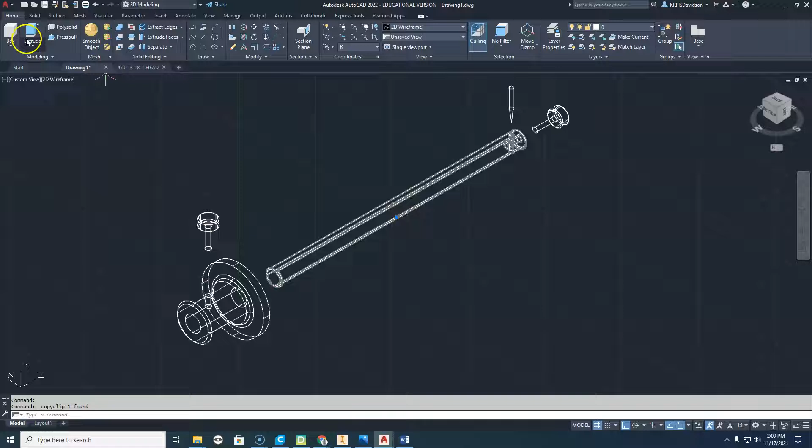Alright, so we're going to make the beam here, just a drawing for the beam in this video, and then we'll move on. So I'm going to go over here and go into this right here, Control C, go to New, and then Control V. I'm going to place that in there somewhere right about here.

Obviously now I look at that and I know right away that if this is my front view, that is not what I want my front view to be. So I'm going to click on that, 3D rotate, and rotate this down. Hit F8 so I get that on there. So I'm going to rotate that down this way. I want to make sure that the flat, which is laying on the back there, is straight up and down.

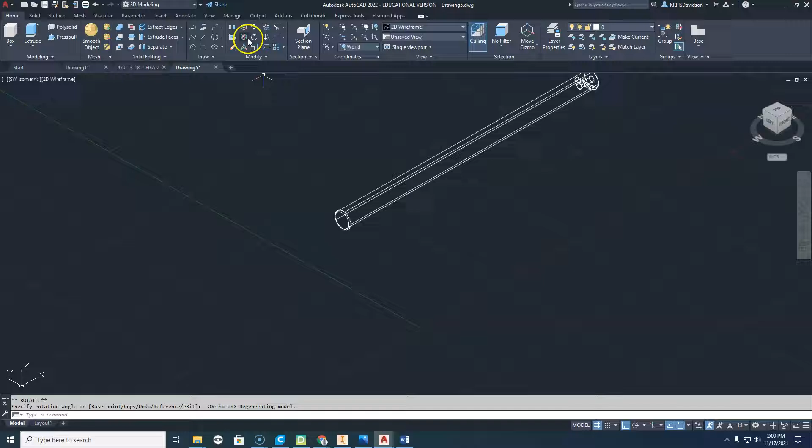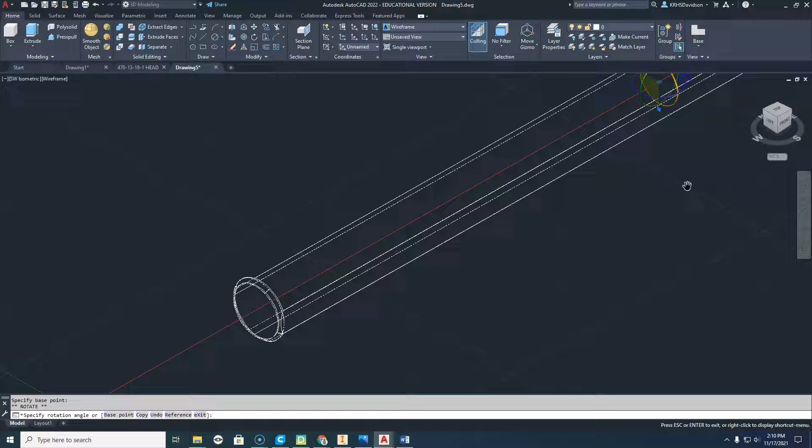So I'll click this and 3D rotate again. What's going on here? 3D rotate, click this part right there, right click, and then I'm going to click the red and make sure that goes downward. Let's see, I should have... oh, so somehow I messed that up. 3D rotate. Maybe I won't go. Alright, there we go. So I rotated it till I get that in the upward position, which is fine.

I actually do want this on the other end because I want that to become a right side view, because there's a hole on that end, so that works out perfect.

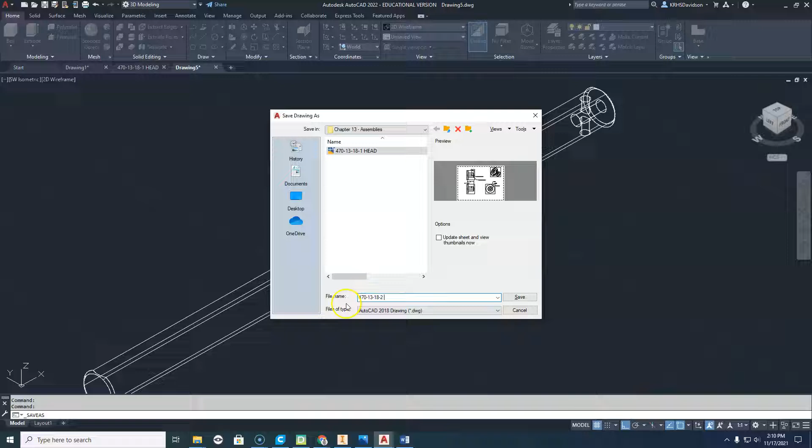So in this case, I'm going to go ahead and click Save. I'm going to save this one as part 2. And this one was the beam. Oops, I'm going to do it all caps. So that's the beam. Alright, so we got a beam in there.

Alright, so now when I go to the layout, I'm going to do my base view, bring my base view in, and put that straight in here like this. Right click, enter. Do a view up above that one, do this view right here, and I can do an isometric up there. Looks like I got this weird looking flute up there. Alright, so for our purposes this is going to be fine.

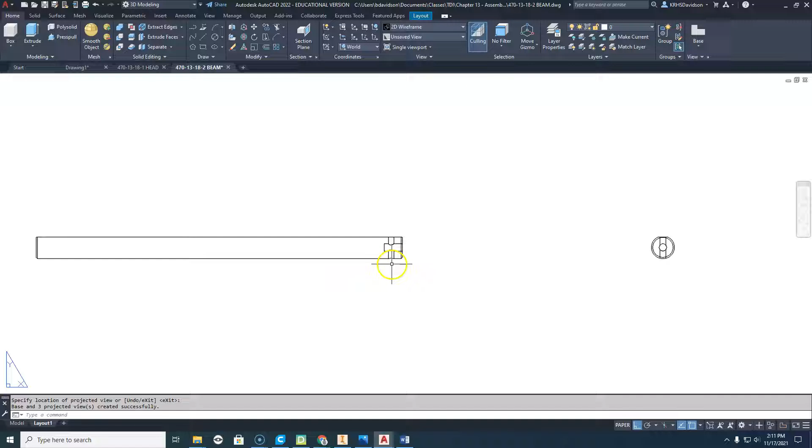And we're going to go ahead and look back at this thing right here, and there's a couple things important to know. It's 0.5 by 8 long. We've got a flat that's 0.2 wide on it right there. We've got this chamfer on both ends of that, and we also have that this thread is on that thing right there, going into the end there.

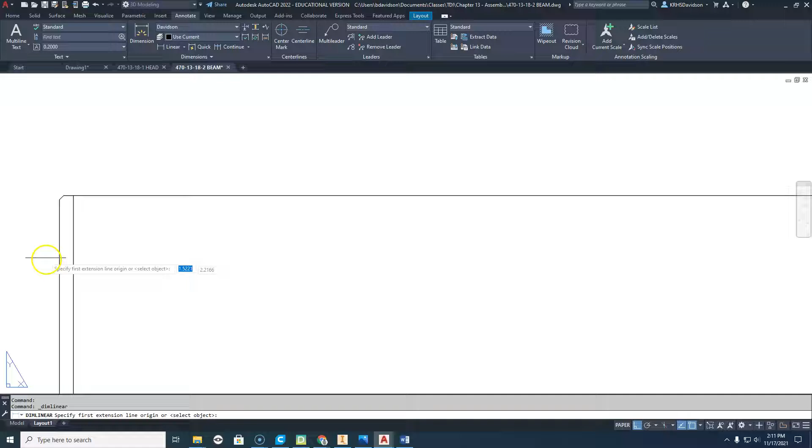So what I would do is I'll go to annotate, click dimension, and I'm going to change the linear dimension and go from the end here all the way down to the end here. And I'm going to zoom back out, kind of pop that rascal right there.

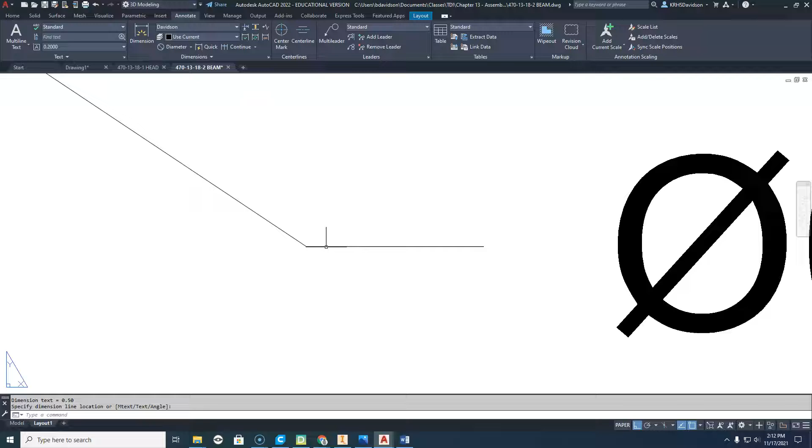The other thing we'll do is we'll go over here, and I'm going to put on a diameter, and that diameter goes on the outside of this right here, and I'm going to go ahead and drop that down right here. So I've already determined what the diameter is. I've got the length of the part right there. Go up here to this view.

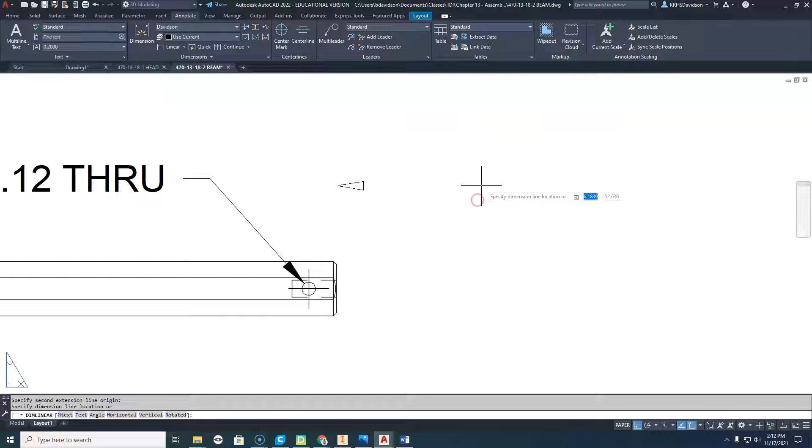I'm going to put a dimension in that tells us that this is a 0.12, and I'm going to double click that, arrow over 1, and then put through. So that's it on that one. I'm also going to do a linear dimension from here to here. Say that's 0.25. So that's kind of, we're good on that one.

And then the last thing I would do is probably come down here, and I'm going to do just a leader on here, and do a leader to this part right here. You know what else I could do? We could do, actually I want to do it on this one, because I'm going to do a radius, and I'm going to overwrite it and put that right there. So I've got this radius dimension right there.

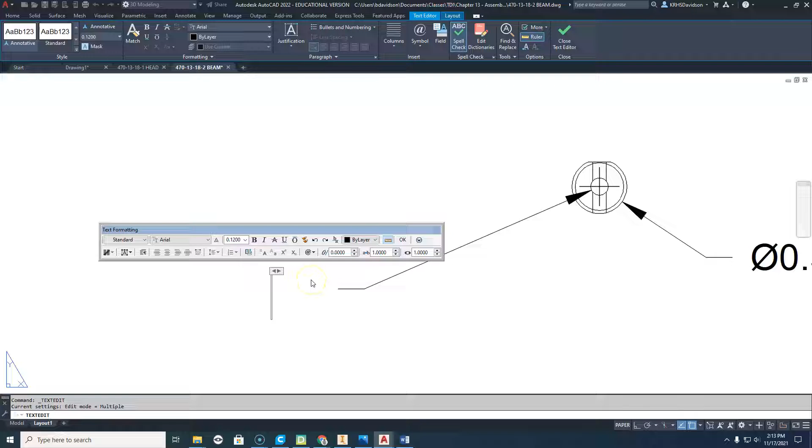Double click on that one, and I'm going to go ahead and delete that so I can override it and put UNC-2. This is actually 2B. Now that I realize that, I did that incorrect before. And we'll go 0.40 deep. Alright, so we'll have to do that.

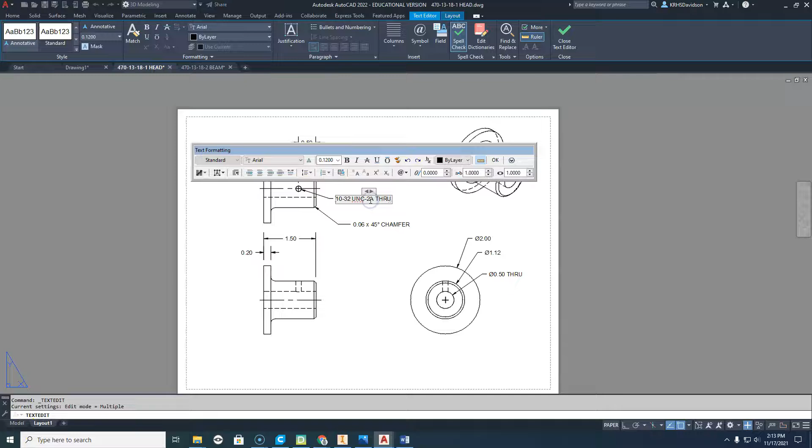So that's that drawing, and it's complete. So what we're going to do real quick is we're going to go back over here to this drawing, and we have to double click on this one and change this to 2B. And then click OK. So now you fix that one. So you fix both of those drawings. And we'll go back to this one, and we're going to click Save. So that one's saved and done.

And that'll be this video, and then the next video will be the 2 other parts. We'll get those done real quick.